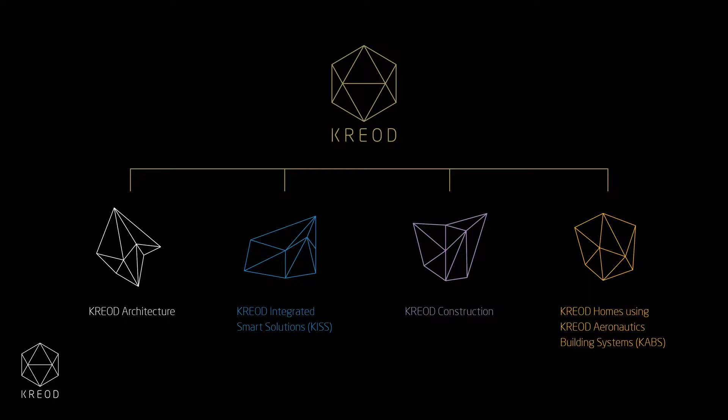So firstly, I'd like to share a personal story: my very first project, named KREOD Pavilion, which was built during the London Olympic Games in summer 2012. Companies such as Apple have the same access to talent, technology, marketing conditions, and consumers as other competitors. So how do they continue to lead innovation? As a typical architecture student back in 2010, I didn't have the recipe for success, but I wanted to design and build a pavilion for my final year project.

When I showed some rough sketches of my ideas to my colleagues, they said this is impossible. The challenge was not only to solve the design issues, but also to raise the money. So the question was how to raise the finance in the middle of a recession for such a complex project. How much would it cost? Who would build it, and where to exhibit it? I couldn't answer all the questions, but I believed.

So I started approaching companies as a salesperson for sponsorship. After thousands of attempts, rejections, and failures, I actually sent out around 5,000 sponsorship sales pitches via posts, emails, phone calls, and meetings, and spent around £2,000 on envelopes and stamps. Luckily, I convinced a range of people and companies to believe in my pavilion design and the workflow, which I will discuss in a few minutes. And they kindly provided me their products and services and made this project happen.

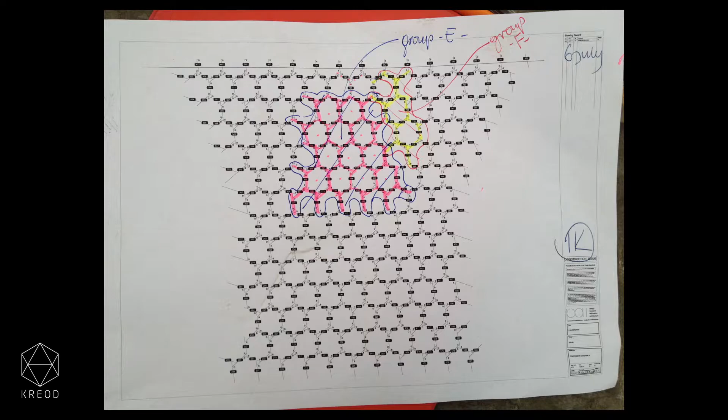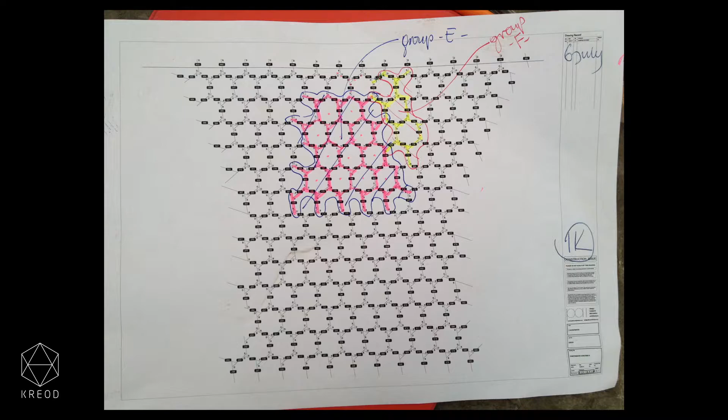So this project is a pavilion and a dynamic exhibition space, so you can push them around, creating different types of exhibition space during the day. At night you can push them together. It glows in the dark like a Chinese lantern, but it also secures itself. And for this project, it's not just a design or DFMA, it's actually a workflow I'd like to talk about. The process was forward thinking, from design, engineering, manufacturing to construction. It was paperless. The only paperwork we had was the assembly diagrams, which were printed on A3 paper.

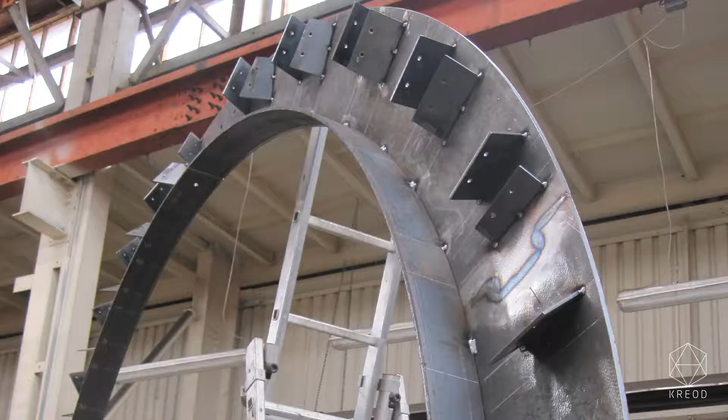So this is the steel base, we call it the steel plinth, and the steel hoops. I did detailed building information and manufacturing modeling. I call it BIMM, B-I-M-M. I issued this 3D model directly to the steel fabricator in Nottingham. A couple of weeks later, the steel fabricator came back to me with a set of shop drawings. And I was very curious, actually. If you have the detailed fabrication modeling, why do you need drawings?

It's almost like one step forward and two steps back, just like the general BIM models we do on Revit or ArchiCAD or other BIM software. We do these intelligent 3D models, and then we issue 2D drawing packages for construction purposes, which is rather strange. So if you look at this image, the brackets are in different shapes and angles, and the question is, how do you describe them on 2D drawings?

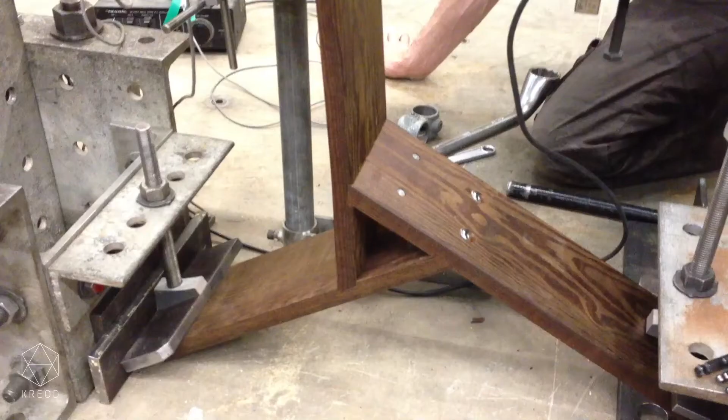And the next one I'd like to share is this one-to-one scale mock-up and the engineering testing at Cambridge University. So this pavilion has got reciprocal connection details.

So option A, we didn't have a notch. As you can see, there's no notch here. This is option A, and unfortunately the engineering test wasn't ideal. But option B, we have these notches, which is much stronger. And the problem was, introducing notches means more fabrication process, which will cost a bit more money, which is a bit problematic. I had a very tight budget for it, but I managed to convince the fabricator to do the notches

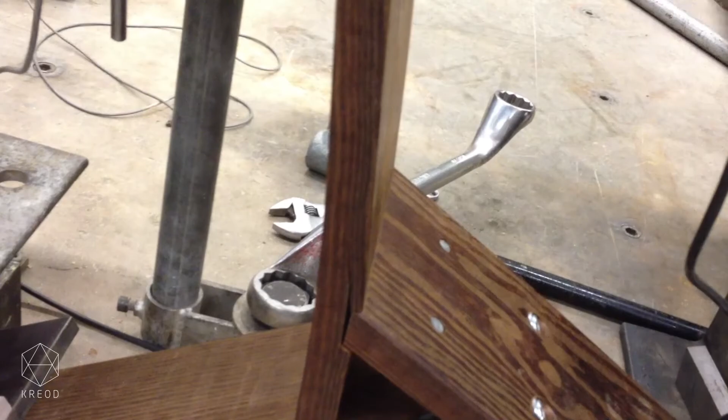free of charge. Another thing I'd like to talk about is this M6 bolt with dowel connector, and there are washers as well. The structural engineer wanted stainless steel bolts, which are quite expensive. I had to order a large quantity, I think 10,000 pieces minimum. But if we use M6 bolts in mild steel with zinc coating, it's so much cheaper. It's about 12 pence per set instead of £15 in stainless steel per set.

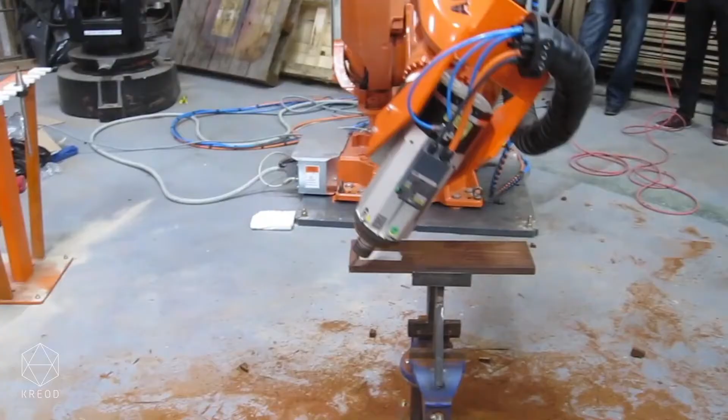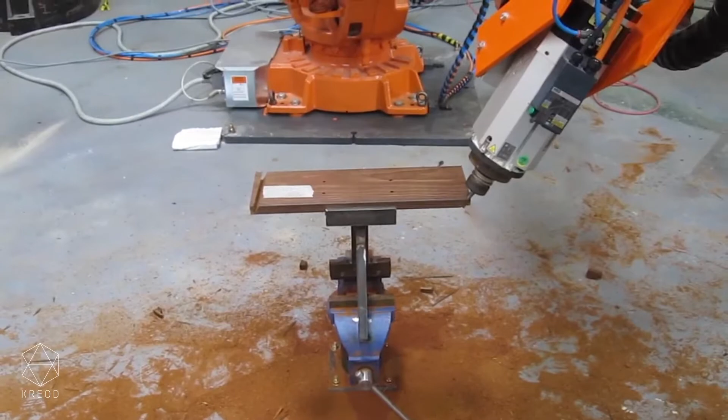And this was the manufacturing process. Each pavilion consists of 997 unique pieces, and the tolerance was plus or minus 0.02 millimeter. So if each component was 1 millimeter bigger, 997 pieces later it will be 1 meter off. So the accuracy is very important.

In terms of sustainability, this is Eco Timber by Cabinet, and we also try to minimize the waste. On the 3D model we created a bounding box for each component, which gives us the maximum length of each component. Then we add 10 millimeters extra for each timber plank. So when you're cutting them, it's actually minimum waste. You can see very small pieces of timber, and the most is just sawdust.

And this is cutting the notches and chamfers, everything, using the robotic arm. Another process we did was converting this building information manufacturing modeling into G-code, so the robot understands it and just carries out the cutting, drilling, etc. As you can see, this component, when you cut it, has a 3-dimensional angle. It just couldn't be made by hand. That's why we had to use a robotic arm.

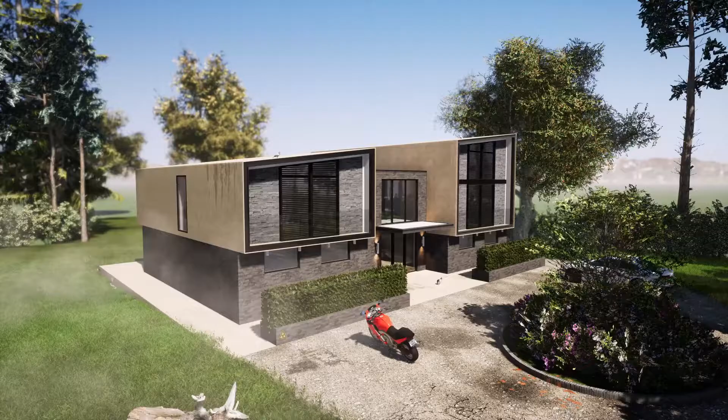So that's the moment I decided to switch to CATIA in summer 2020, and then we started operating as a turnkey design build contractor. So this is the project we did. This is in Surrey, with very open-minded clients who like to use this new construction technique and gave me this opportunity. And the project is on the Green Belt.

They hired 2 architects before me, they won the Grand Designs, but unfortunately they didn't manage to get the planning permission. The planning rules in the UK are quite strict on the Greenbelt and in the conservation areas. Plus, there are so many protected trees around, and yes, we did get planning permission last March, and we started developing.

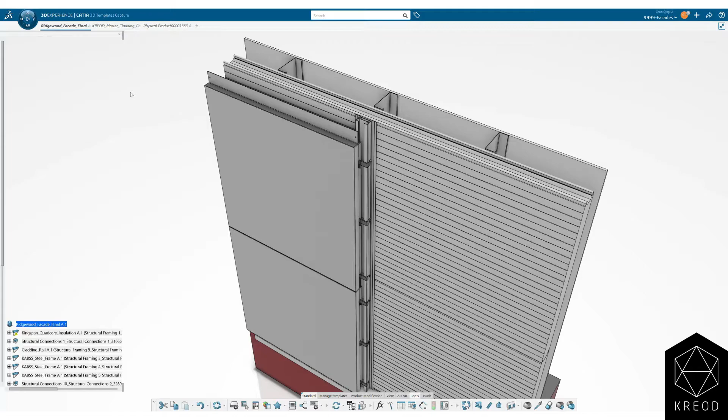We switched on to CATIA, and this was the mock-up we did on the 3D Experience platform. It's a whole system 3D mock-up with 100% details. There's no level of details. I don't really understand why we have level of details in the first place.

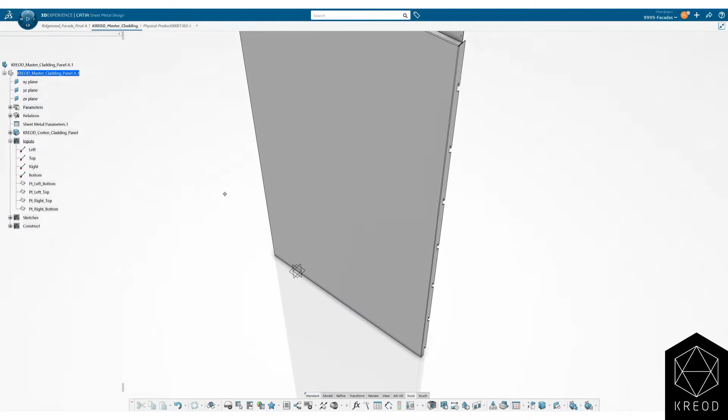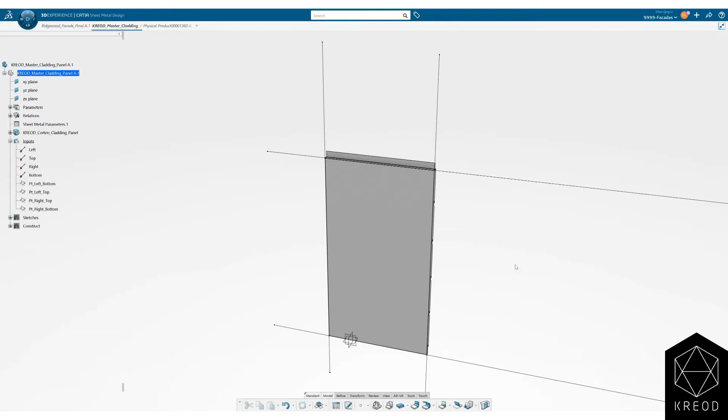So this was the sheet metal design role, so you can unfold them, and you can also set the K factors, the manufacturing, the bend parts. 2mm aluminium was the K factor, and also convert this into a parametric 3D. So it allows me to instantiate this component, panelized, and change the size of the panels automatically.

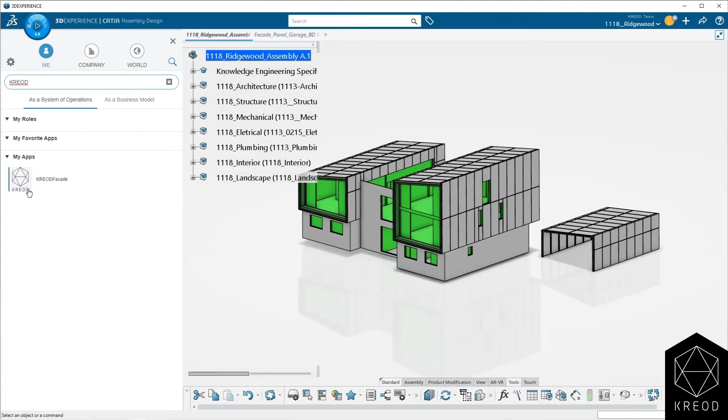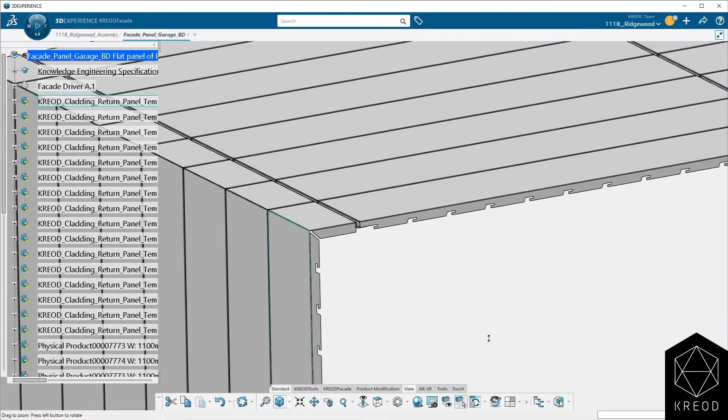And then following that, I did realize the challenge is huge because CATIA is a very difficult tool to learn. So I formed this company called KREOD Integrated Smart Solutions, and we have developed and are still in the process of developing DFMA intelligent automation tools. So we're aiming to save up to 80% of time on design, detail, engineering, and the manufacturing process.

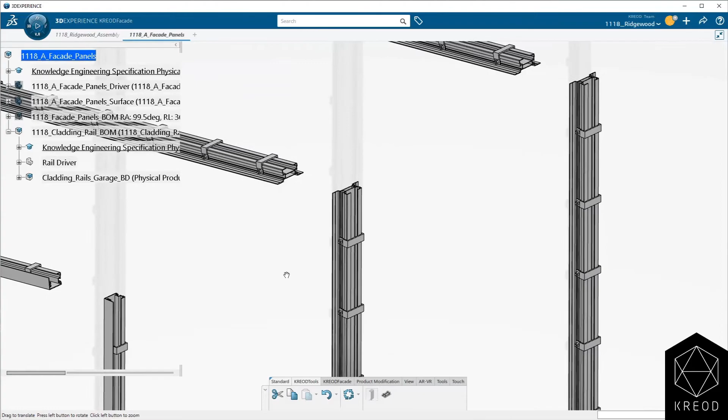From the business and finance point of view, CATIA or 3D Experience is high risk. Number one is the software. It's very, very expensive. And number two, there are very, very few people in the AEC industries who know how to use it. So I came up with this idea. We should develop KREOD's own tools, which are easy to use, getting the building information modeling, building information manufacturing modeling done with just a few simple clicks. This is where I come from.

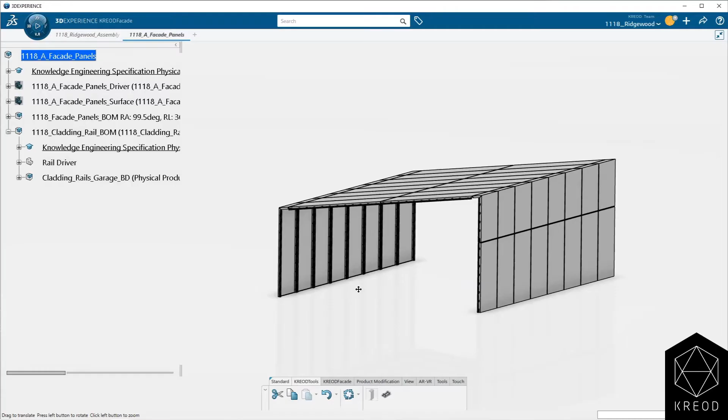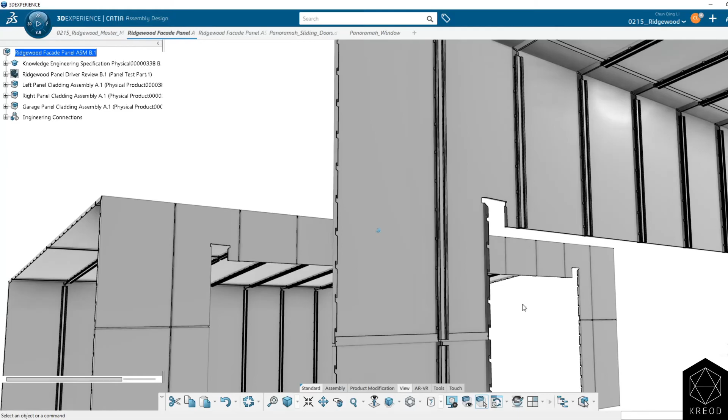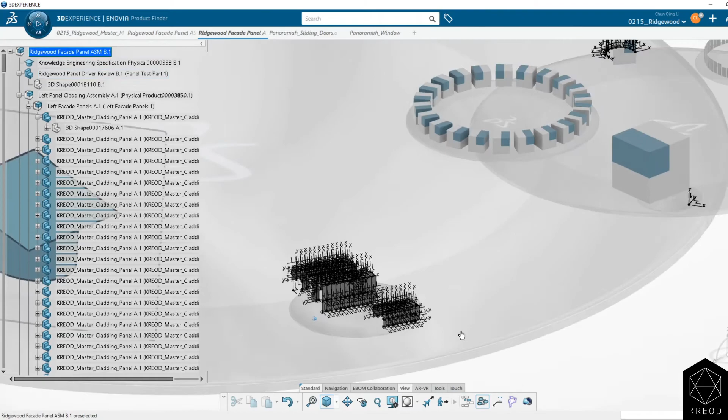This is the demonstration of one of the KREOD tools. It literally takes a few minutes to generate the details. And this is another example. That's just the facade. This building took about 5 to 7 minutes to generate 100% detail with a manufacturing BOM list. As you can see, all the details, parts, and components. Here we have the cladding panels in different sizes. Cladding rails and brackets, bolts and nuts, all here.

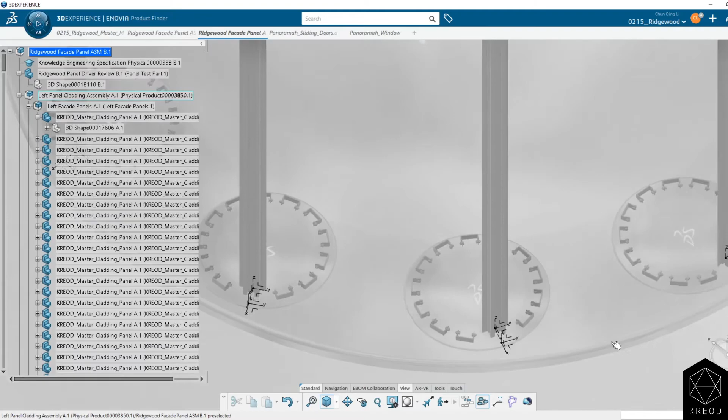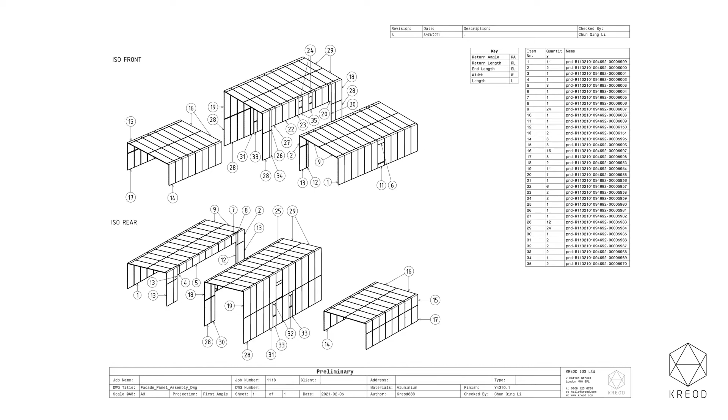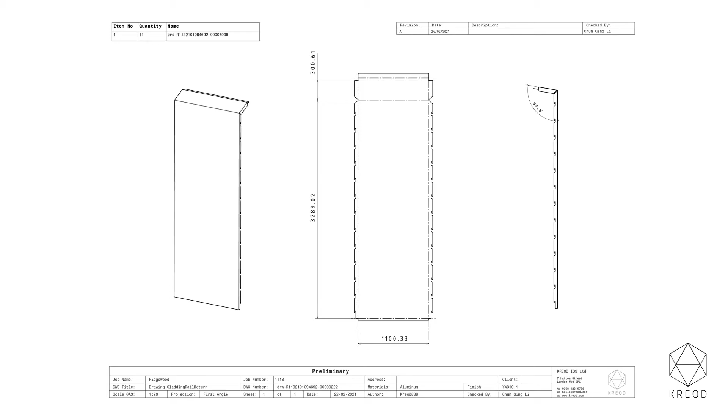And we programmed the tool so it generates the shop drawings automatically. So it does a list as well. It tells you there are 35 types of panels, and each type consists of numbers: type number 1, quantity 11. So automatically generated shop drawings, the panels, the size, dimensions. So I just issued this drawing package to a steel fabricator directly. As a developer and turnkey design and build contractor, I'm more interested in the cost, so the KREOD tool could give me an accurate cost without a quantity surveyor.

And another question is, we did all this intelligent automation, which is great. What then? We still had to rely on people on site to assemble these buildings. So how to do that? Because the builders, they have very simple minds. They just want to know what needs to be done. They don't really get all this technology side.

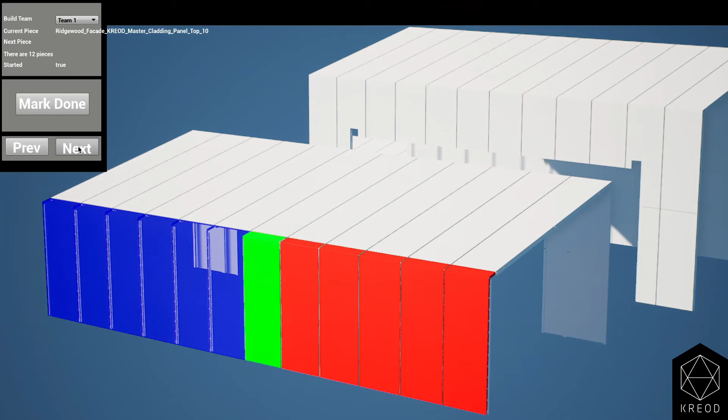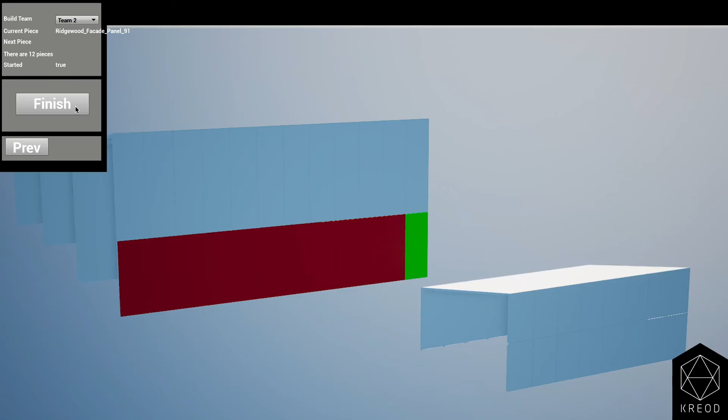So in that case, another solution we create. We are also in the process of developing a construction sequencing management tool. So it just informs the builder what's the next component that needs to be assembled on site. So it's very simple and straightforward. Obviously, this tool is still at an early stage, and it will be ready by the end of June, I think. So we aim to save up to 50% of time on the construction speed.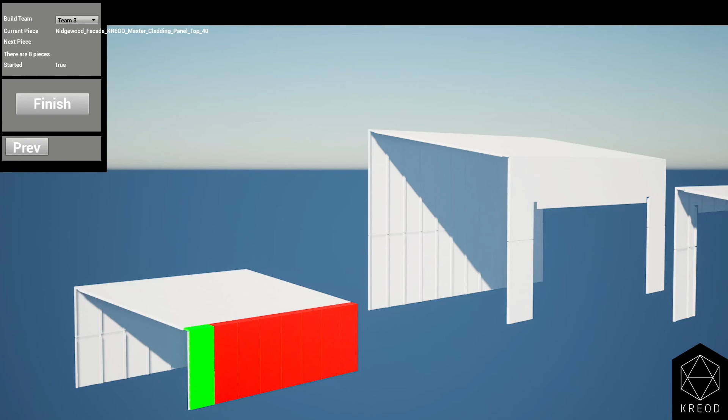And also we're in the process of developing a range of new social housing projects. So all these savings on the design, engineering, fabrication to the construction, KREOD will contribute 40% of cost saving to the social housing developments. So it means that we are in a very powerful position to design and deliver high quality and sustainable homes.

So Henry Ford once said, if I'd asked people what they wanted, they'd have asked for faster horses. Does this logic hold up today? So my question for everyone in the AEC industries is, what solutions do we want exactly? And I do hope the answers are something beyond the BIM.